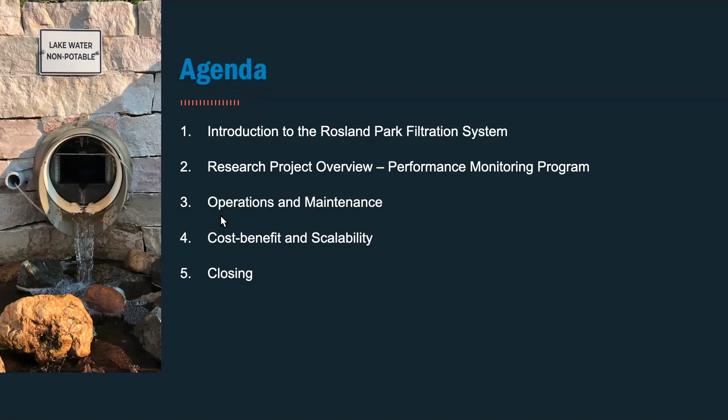Okay, so where are we going? The first few slides, Erica will run through the background and the higher level picture of how we got to the point of putting in the stormwater filter. I'll go over the results of our actual research program, the performance monitoring results. We'll look at the operations and maintenance we've had to do over the last 3 years. We'll look at the cost benefit, scalability, and then we'll have some closing remarks.

Thanks, Andy. So as Andy mentioned, I'm going to provide high-level context and background of our decision to install the high-volume stormwater filter in partnership with the city of Edina.

So for those of you familiar with the Twin Cities metro area, the project location is just off the southeast corner of Highway 100 and 62. And I know we have some folks joining from outside of Minnesota, so this project location is in the city of Edina, a southwestern suburb in the Twin Cities metro area of Minnesota.

This filter is located in Rosland Park, which the city of Edina owns and operates. The filter is located between Swimming Pool Pond and the north basin of Lake Cornelia. It's in a fairly heavily used park with amenities like disc golf, a playground right there, and it's also right near the Edina Aquatic Center.

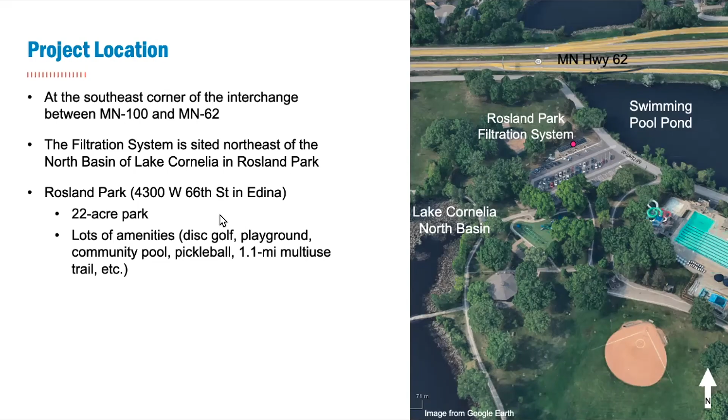So why did we need to think about installing a filter in the first place? The big picture is Lake Cornelia is unhealthy. It is a shallow urban lake that receives a large volume of stormwater runoff.

If we look at the graph located here, what you see is summer average total phosphorus. The darker orange bars are for the north basin of Lake Cornelia, and the lighter orange bars are the south basin. There are 2 basins to Lake Cornelia connected via a pipe. What you can see from this graph is, since monitoring data displayed from 2003, we are above the state standard for total phosphorus in a shallow lake. So we have an unhealthy lake with a lot of phosphorus fueling algae blooms, and we're seeing blue-green algae blooms in this lake quite frequently.

So poor water quality, highly impervious watershed with a lot of watershed stormwater runoff. And beyond that, there's also a 2018 total maximum daily load that identifies phosphorus and has a phosphorus reduction goal for North Cornelia. Beyond phosphorus, there are other water issues with this lake.

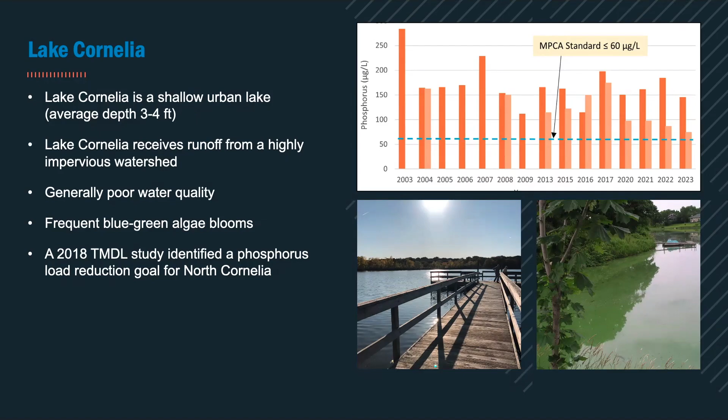Beyond the filtration vault we're going to talk about today, there were other management strategies that we looked at and addressed.

So again, the primary phosphorus sources to Lake Cornelia include watershed runoff, our external sources coming into the lake, but there are also in-lake sources. We have phosphorus loading from the sediments in the lake.

Since 2019, we've been working on some improvement strategies as the watershed district. We did an alum treatment in 2020 to minimize sediment phosphorus loading to the lake. The city of Edina had also been doing curly-leaf pondweed treatments, which the district took over in 2023.

And then we've also been doing goldfish management. I mentioned we have a lot of goldfish in the lake, and I was going to share the number we've taken out because it might astound some people. Between North and South Cornelia, between 2023 and 2024, we've removed 67,000 individual goldfish from these two lake basins, amounting to about 5,000 pounds of goldfish. Fortunately, we've seen some response in the native fish population — we're starting to see a better, healthier native fish population in the lake as a result.

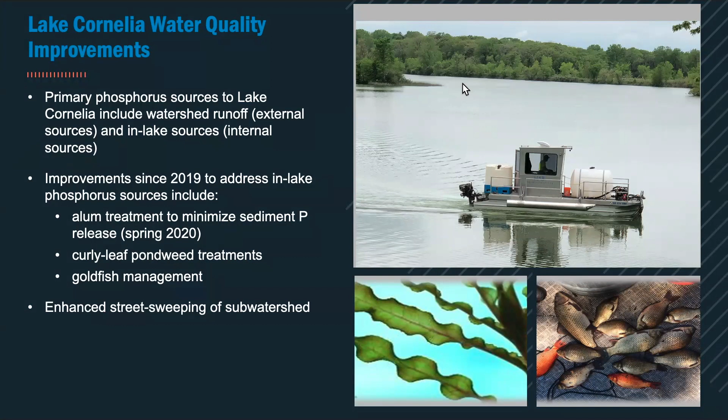So we're talking about BMPs in tight urban spaces. Just to give you some context to the sub-watershed draining to Lake Cornelia and Swimming Pool Pond, there's about 410 acres that drains to Swimming Pool Pond, highlighted in yellow. It's very densely urban — we have Southdale Mall, a medical complex, a lot of hard impervious surface, and part of Highway 62 that's draining to Swimming Pool Pond.

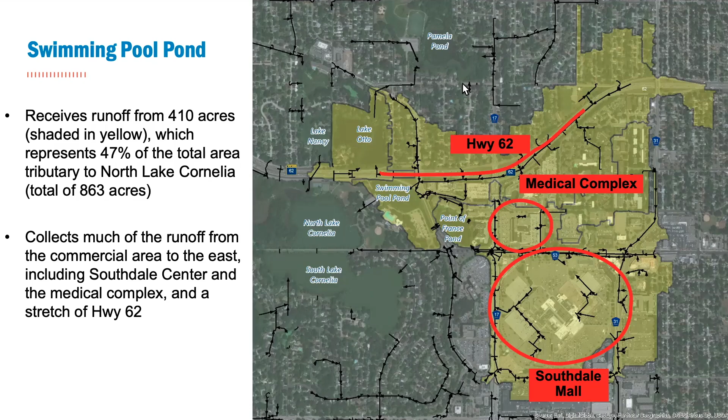That's about 47% of the tributary area to Lake Cornelia. So again, we're dealing with these highly urban spaces, and we have to figure out how we can manage the external load coming into these water bodies.

So what were the objectives for the watershed district in partnership with the city of Edina to install the Rosland filtration system? I think you've probably already realized we are really trying to address the external phosphorus loading to Lake Cornelia so we can have a healthier water body.

We're also trying to manage installing a best management practice in a small footprint. One of the desires from both the city of Edina and other stakeholders was to preserve green space in the park, so we really needed to minimize the footprint of the filter as we looked to design and install it.

And then finally, we are looking to utilize the existing storage capacity to provide a near continuous water source to run the filter. What I really mean by this is we are looking to not only run the filter when we have stormwater runoff or rain events, but we are looking to use a water body to be able to run it continuously.

So how the filter operates: under normal water levels, it pulls water from Swimming Pool Pond. And then when we have lower water levels, it's actually able to pull water from Lake Cornelia.

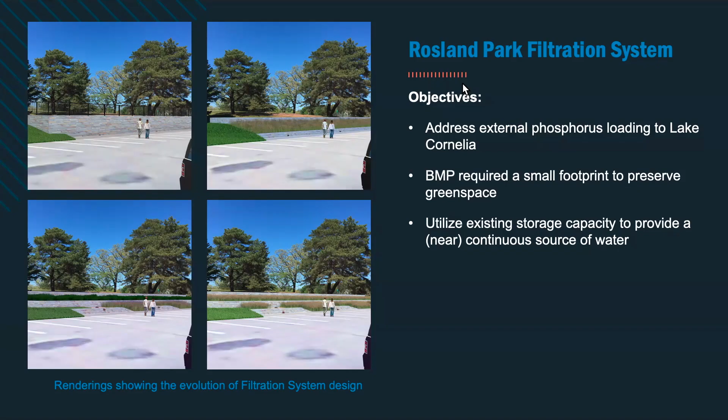The system was constructed in 2021 through early 2022, and we got it started up and running in the summer of 2022. Then in August is when we started the heavy-duty monitoring to really understand how the system is performing, what it's doing. Again, this work was supported by the Minnesota Stormwater Research Council and funding from the 9 Mile Creek Watershed District.

I definitely want to call out again that we had a grant from Hennepin County through their Opportunity Grant Program, and the Board of Water and Soil Resources through a Clean Water Fund grant, for the construction of the filtration vault. So we had about $850,000 in grant funding for the installation of this vault as well.

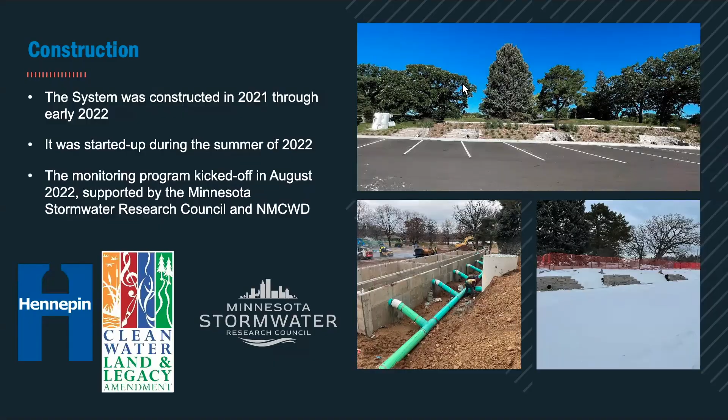And with that, I'm going to pass it back over to Andy so he can get into the details of the construction of the vault, how it works, and the monitoring, which I'm sure you're all excited to hear about.

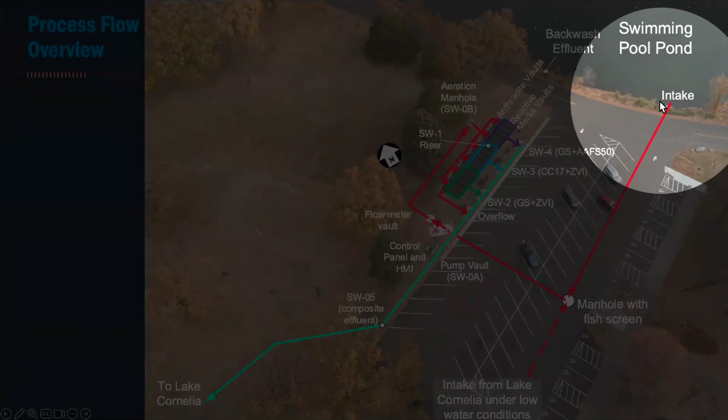So just to walk through where we are, starting up here, this is Swimming Pool Pond. The intake structure comes down to a manhole where we've installed a fish screen and a T that comes over to this little concrete pad where we have a pump vault. Inside is a submersible pump that's capable of pumping out about 400 gallons per minute.

It then flows via pipe through another vault that has a magnetic flow meter so we can monitor the inflow and flow. Still underground in a pipe, coming over to a vertical standpipe that we've called an aeration manhole. What this is, is a vertical pipe where the water is allowed to cascade 3 feet down or so just to aerate it.

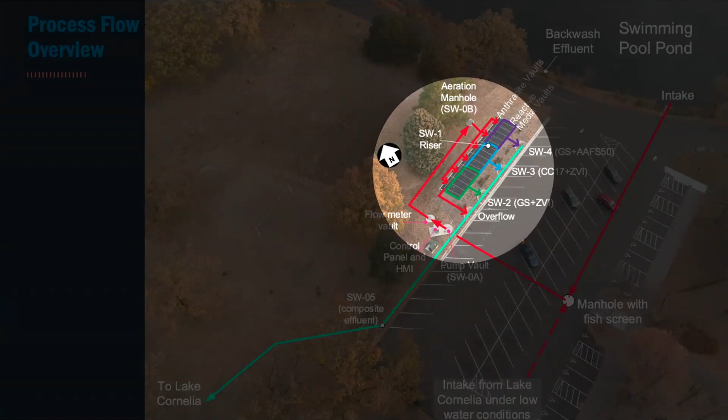And then from there, now we're flowing again through a pipe, following the red lines. Then we go through a manifold through 6 anthracite pre-filtration cells. And then the green, blue, and purple are our reactive media cells, that's what's actually doing the phosphorus absorption. Everything from there is gravity, so we go from the green, blue, purple cells down through this teal pipe to Lake Cornelia.

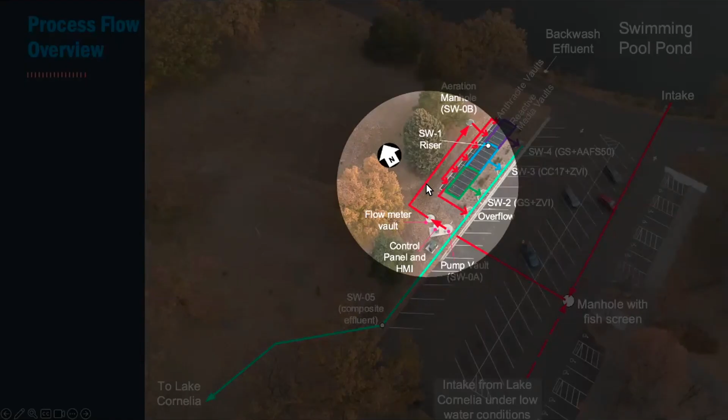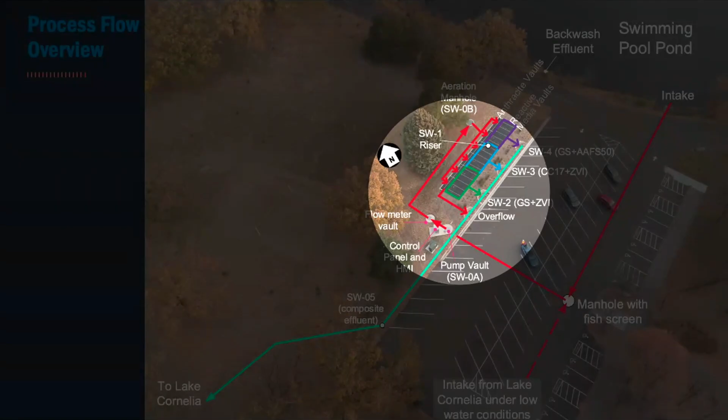The last thing I want to point out on the process flow is right about here, you'll notice this other red line. In the anthracite, its main purpose is to remove suspended material before we get to the reactive phosphorus absorption media. When that anthracite basically gets full of all the TSS and other debris we're removing, that water overflows. The intent is that an operator can easily drive by the system and say, oh, I see lots of flow coming in the overflow, time to do a backwash.

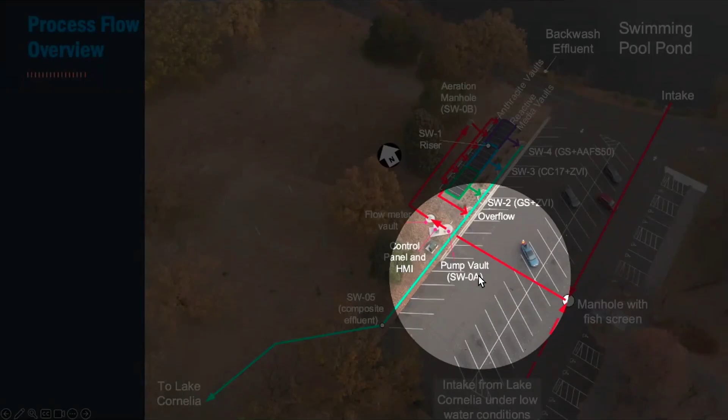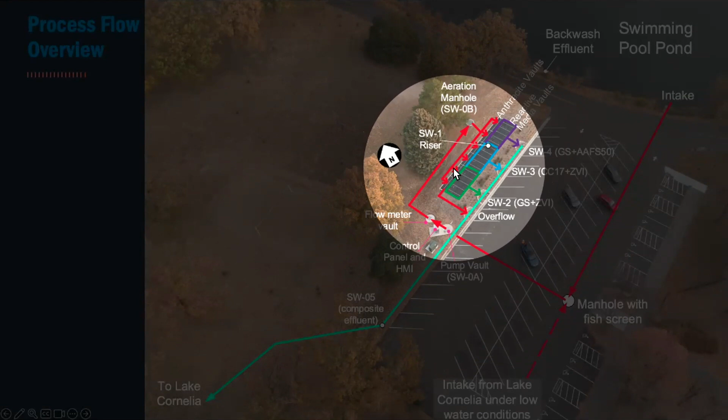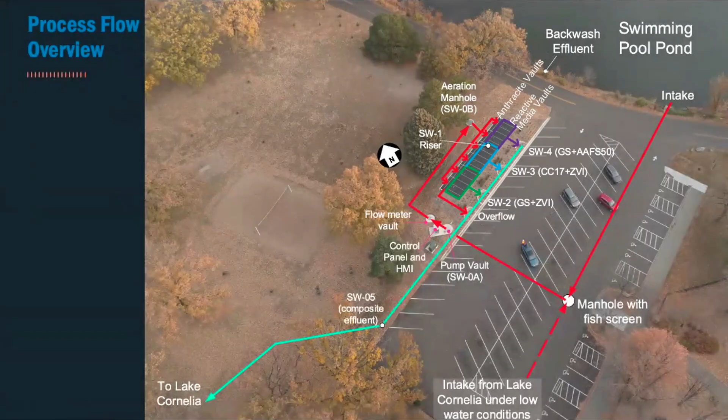Okay, so we just did this walkthrough, but just to give a little bit more granular context. Anthracite again, we have it split into 6 different cells, and the reason is so that we can perform a backwash using the forward flow pump. When we're doing a backwash, what we're really trying to do is fluidize that bed, and typically you need a higher flow rate than your forward flow rate to do that. So if we're going 400 GPM forward, to do a backwash we need to split it, and just by the math, how the calculation works out, we figured we needed to split that cell into 6 different cells so we can do a good job backwashing the media with a forward flow pump.

Backwash in this case is a pretty manual operation, so we have to physically go out, turn off the forward flow valves, and then manually turn on the pump for each cell, and do that for anywhere from 15 to 30 minutes or so per cell.

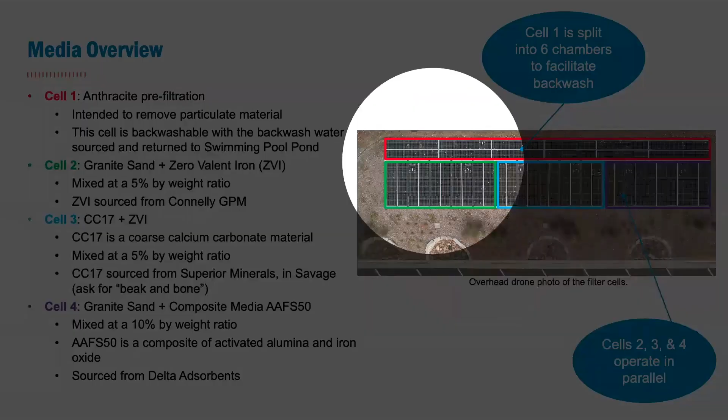So the media, I think I mentioned already, is anthracite. Anthracite is a hard coal-based material. We use it a lot in the drinking water treatment area, it's in lots of mixed media filter cells. If you see a mixed media filter cell, typically there's 3 layers: sand, garnet, and anthracite. Anthracite sits on top because it's less dense, and it's a little bit coarser, so you don't plug it up before it goes through the finer material. In this case, we're just using anthracite, so we don't have a mixed media filter cell, it's just anthracite.

Then we go into our color coordinated cells, so just going through the list. Our first cell has granite sand with zero valent iron. Zero valent iron is just the iron in iron enhanced sand filters, it's just shards of iron. Granite sand is just a little bit coarser sand than typical C33 sand that you might see in an iron enhanced sand filter, but we're trying to do basically the same thing, mixing iron with an inert carrier media that holds the iron in place.

The next cell, the blue one, is CC17 mixed with ZVI, zero valent iron again. CC17 is calcium carbonate, it's a pretty coarse aggregate material. We sourced it from Superior Minerals in Savage, and I love this, the media is actually called beak and bone. So if you're looking for it, I asked the guys, I was like, what is this, crushed up beaks and bones? No, it's a feed supplement, and maybe y'all knew that, but I was pretty astounded.

So it's a pretty cool media. The last one, the purple granite sand, is the same inert media as the first green one. It's a composite media we sourced from Delta Adsorbents, AAFS50. AA is activated alumina, and FS is ferric sorbent, so it basically has activated alumina, which is aluminum oxide Al2O3, as the support, with a coating of iron oxide on the outside.

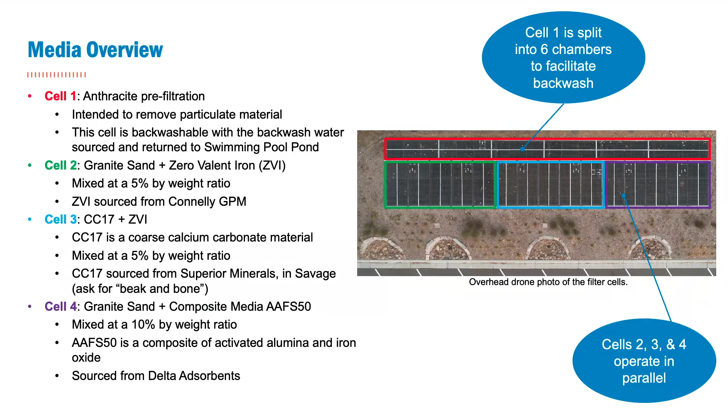So all three of these cells, the green, blue, and purple, run in parallel. It goes down through the anthracite, and then we come out through each of these media cells.

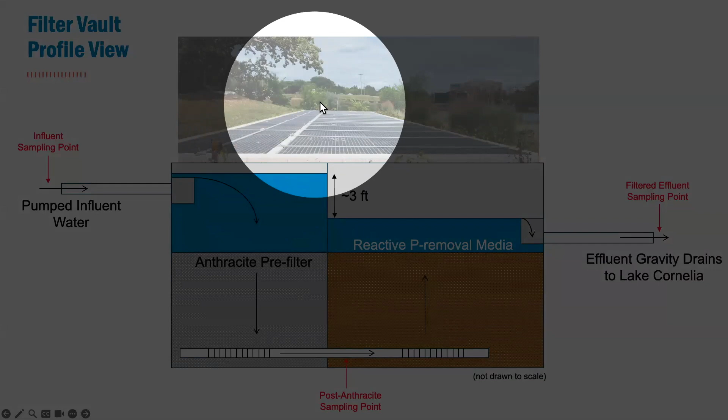This gives you a profile view of the filtration system. This is not an actual picture, as if we're looking sideways at it and slicing away the ground. We have our influent water coming in on the left-hand side. That flows over a weir structure down through the anthracite, through an underdrain system with perforations, then flows over and up through the reactive media, then out, and gravity drains to Lake Cornelia.

We're collecting samples through this monitoring program at the influent, and before and after anthracite. To collect this sample, we have a standpipe in one of the media cells that runs all the way up. So we're collecting water before it's going through the reactive media, and then to get the last bit, we just collect a water sample as it's overflowing out the effluent.

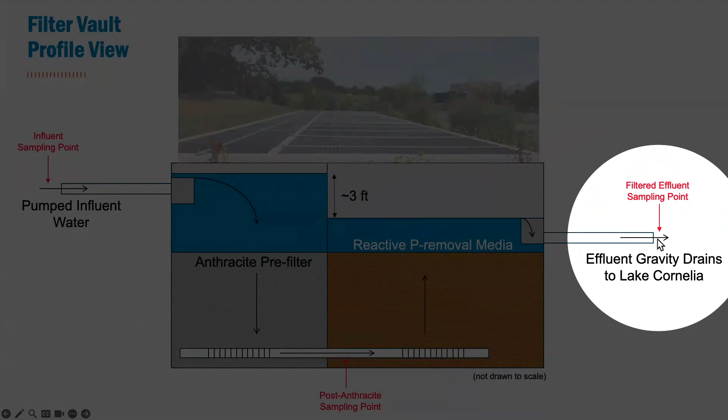The media depths here are about 2 feet of media, but it's not drawn to scale because we have about 3 feet of head between these two cells. The purpose of the downflow-upflow configuration is to take advantage of the small amount of head we have to push the water all the way through the media.

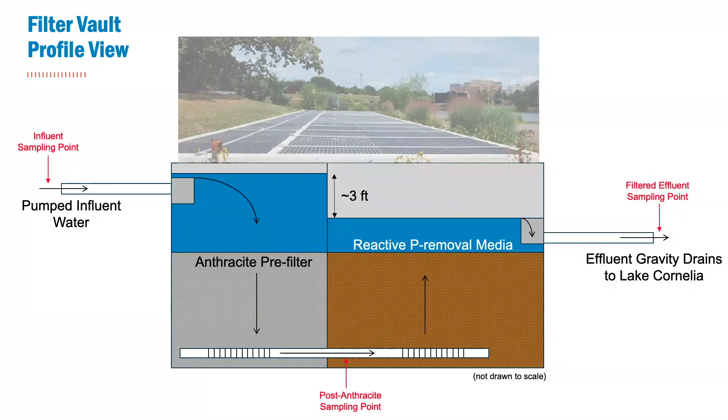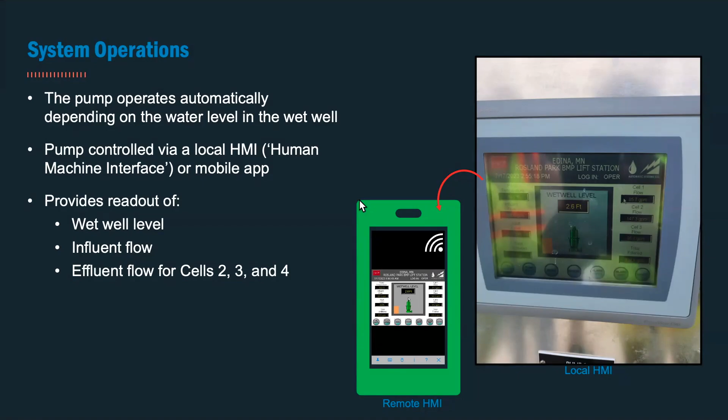The other cool thing is we have a remote HMI, hooked up to a cellular service, so we can access it on the phone and turn on and off the pump as needed, and see if it's operating, which is really helpful since monitoring the cell is our main purpose here. We check: is it operating? Does it look like good conditions? Let's go collect a sample.

It's a removable sheet of expanded steel - you pull it out and clean it off. The two main routine maintenance operations are backwashing the filtration cells, mostly done by the City of Edina. Backwashing is a manual operation that takes about 2 hours per backwash, and there are 6 cells, each backwashed individually.

The frequency of backwash depends on the season. In the shoulder seasons, spring and fall, we can get longer run times, maybe about once per week. But in summer when we have algae cooking, twice a week is good, sometimes more. The fish screen itself also needs cleaning, because we get algae, filamentous algae and debris building up on it that acts as a dam on the pump, so we have to go out and scrape it, sometimes more frequently than a backwash.

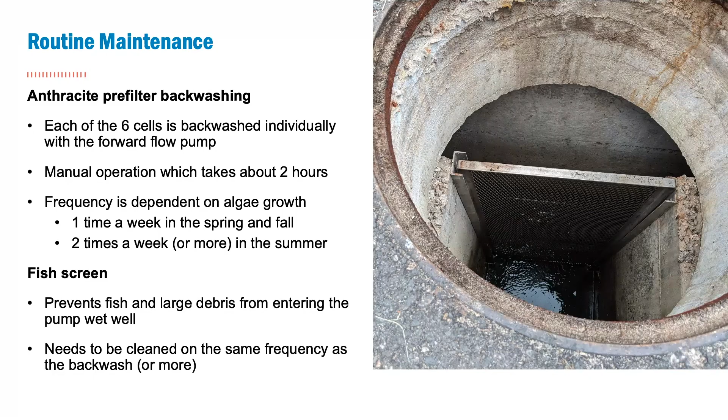Between August of '22 through the end of last season, which was around August or September, we collected 24 sample sets. And these are the parameters we looked for.

And then we did some reduced frequency sampling for total alkalinity and some metals. The primary purpose of these metals - we have calcium, magnesium, those are our hardness parameters, and then we have iron and aluminum. We're looking at media integrity.

Just to orient you - I think we've already seen some of these pictures, but this is the effluent from the filtration system going up into Lake Cornelia here. That's a YSI in a jar. Here we're looking at our last sampling point, a small hatch that goes to the effluent. It's a combined effluent sample that gets both the filtered effluent plus any of the overflow.

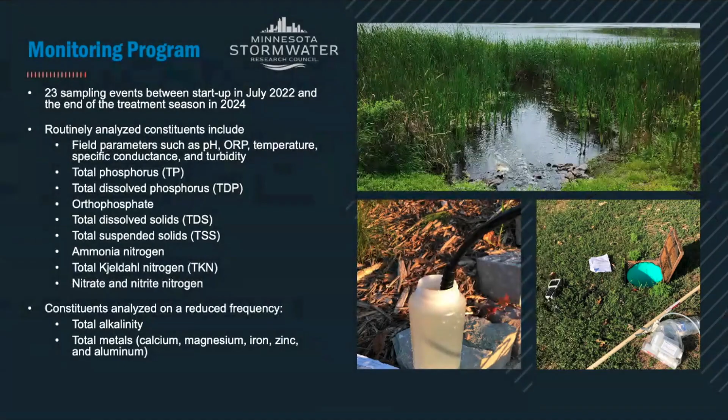The average flow range for the pump is somewhere around 400 GPM, and again, only about half of the flow is going through.

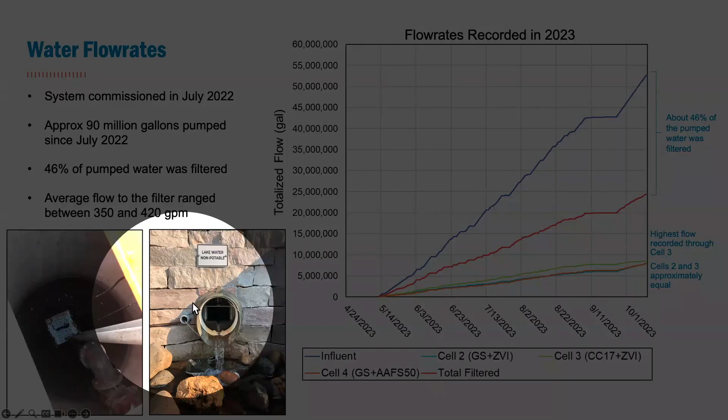I wanted to point out, because the flow meters are kind of interesting - there's a little plastic weir structure here. The weir is just calibrated elevation to flow. And on the left-hand side, you can see a little PVC pipe sticking out next to where the water is coming out. That actually has some bubble tubing coming out that goes behind the weir, at the bottom of the pipe.

It just sends out a little bubble once a second or so, measuring pressure - the elevation of that water in the pipe. And we've calibrated it to flow. So that's how we measure effluent flow.

So 2023 is what we're looking at for flow rates on the graph. In 2022 we weren't yet recording real-time flow data. And in 2024, unfortunately, we still have the influent flow, but the bubblers did not hold calibration - we would get good data for a few days and then they would be all wonky, so we'd be seeing flows that looked bigger than our influent, which didn't make sense. So what we're looking at here is really the influent flow in blue from 2023.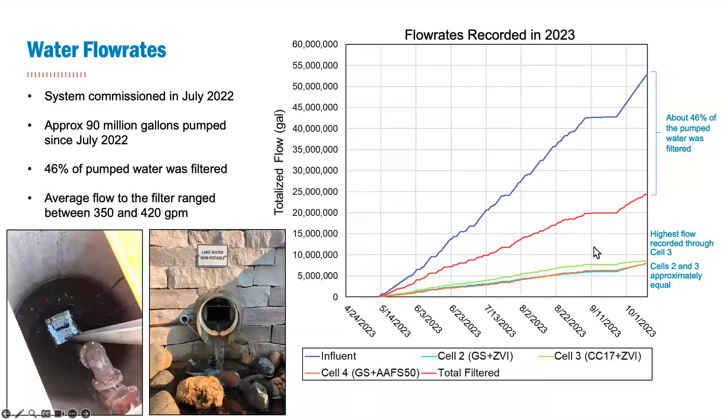Okay, that's flow. Now looking at some field parameters. So just to walk through, the x-axis is the same in both, it's month and year down here. And we're looking at pH and dissolved oxygen.

We have 2022 separated by winter, 2023 separated by winter, and then 2024. The colors are a purpley dark blue, green, teal, and orange. We're looking at pH through the filtration cell, and dissolved oxygen through the filtration cell.

A few key things I want to point out. For pH, you'll notice 2023 again has our best record. We see this quite high increase spike that's probably the algae working, sucking all the CO2 out of our water. Because we know how alkalinity, CO2 and pH work, pH goes up. So we get this temporary hump when the algae are really working.

We see it again in 2024, although it was a little bit delayed. And in 2022, because we only got 3 good data points, you can see the pH is still relatively high relative to where it is coming out of the filter.

I think there's a couple of explanations as to why the pH comes in so high and why it's moderated as it's coming out. Because it's CO2 driven, my guess is that we're pumping and moving the water around and it's coming back into equilibrium with CO2 in the atmosphere.

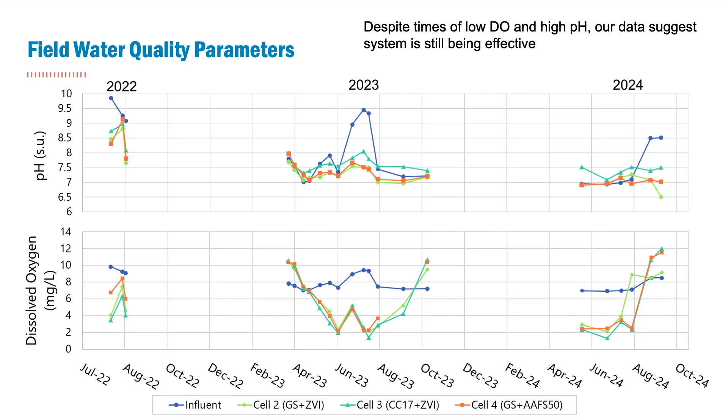And even though we see these wild swings, where we see high pH, and we might think that's really bad for phosphorus adsorption to iron, and we see low DO, again, because we could get reducing conditions for iron and then release the phosphorus it's adsorbed - even though we've seen these things happen, we haven't seen a result in release of phosphorus from the filter. But I think monitoring these field parameters is still really important for the system.

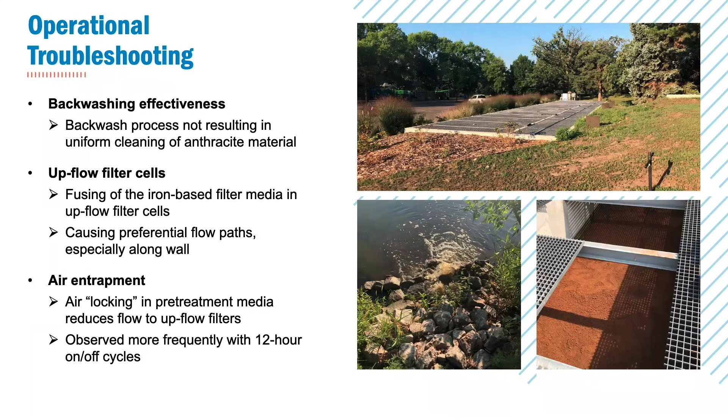Okay, so we talked about the media fusing and the backwashing. For backwashing, the plan here is to get a higher capacity pump, something that will give us more oomph when we're doing a backwash cycle.

I think we need something on the order of 700 GPM. So the engineering challenge right now is really to figure out where we can get that flow to make that happen.

Key design parameter here, pertinent if we're thinking about TSS or particulate phosphorus removal in a filtration system like this: we can't make assumptions in terms of summertime high temperatures to get the same backwashing fluidity. The temperature of the water matters because the viscosity changes with temperature. The colder it is, the more gel-like it is, and the less ability it has to raise and fluidize the bed. So if you assume your temperature is warmer than it actually is, you're not going to get the same oomph. We assumed warmer water temperature than we actually had.

Media fusing. I've got a couple of pictures showing our attempts to do this activity by hand. This is a 2-foot media depth, looking at cell 2, the granite sand with ZVI mixed with it. It was fused the whole way through — the top wasn't just loose and the bottom fused, the whole thing was fused.

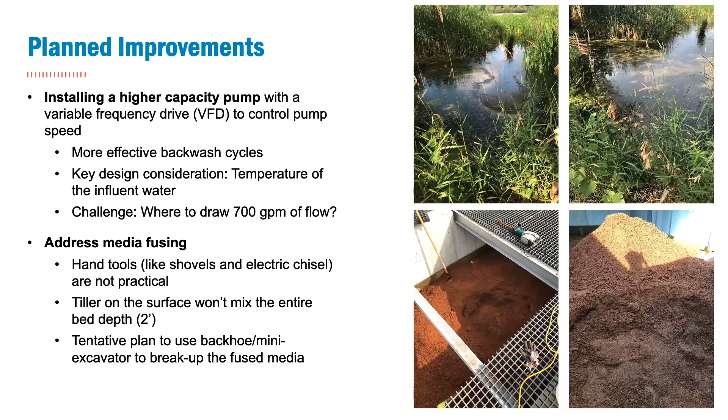We were using this electric hand chisel, basically a mini jackhammer, oscillating back and forth to try to break this stuff up, because using a shovel or hand pick was a lot of effort. We did as much as we could by hand as a research team, but our challenge was we had nowhere to put the media because we've got vertical walls all around us. So the plan is we've got to bring in heavier equipment, scoop out some of the media, break the rest up by hand, maybe use a vactor truck. That hasn't been decided either.

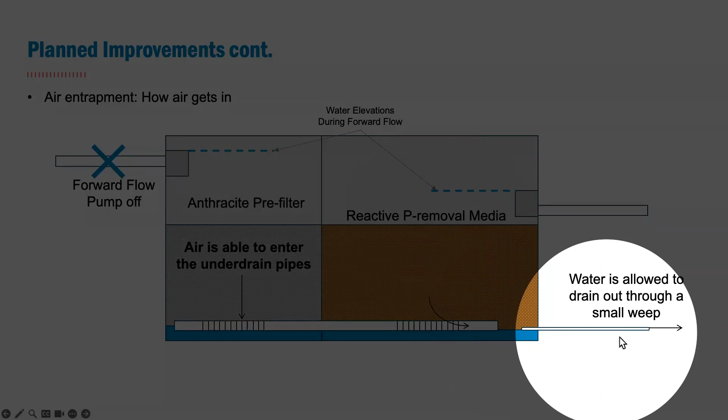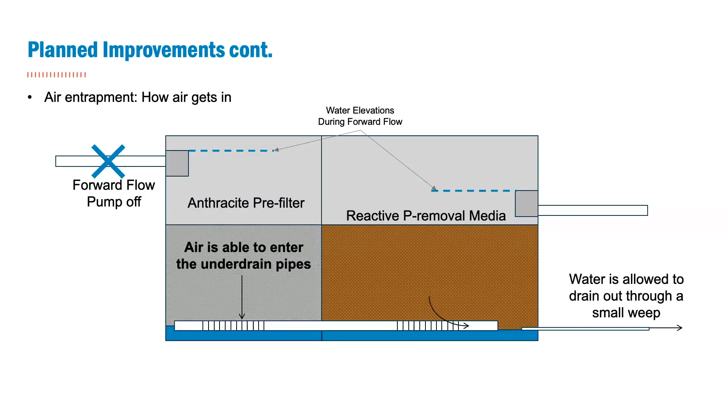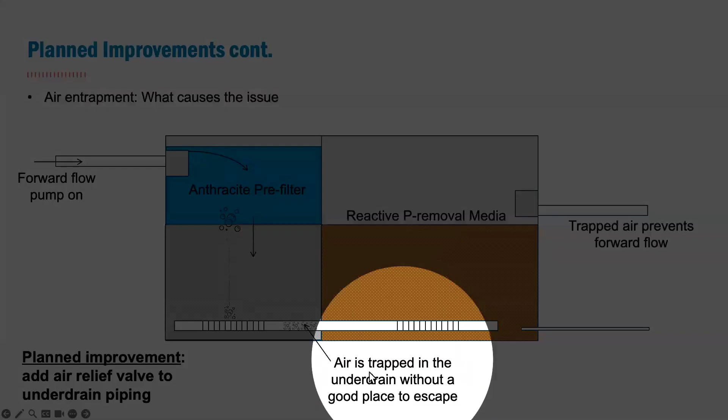That allows the media to dry out over time. Over those 12 hours, you'd get media that is dry, except perhaps below the weep drain's invert elevation. This is when air can get into the under drain system — we've dried it all out, it's drained. Then we go to forward flow, 12 hours have passed, it's morning again, we're pulling water. What we see is basically a column of water that just wants to sit on top of the anthracite. My feeble attempts at illustrating this — we've got air stuck in that pipe with nowhere to go.

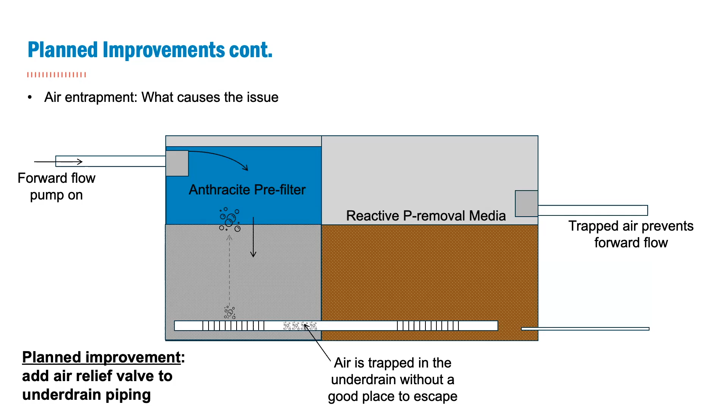So the fix for something like this: in water treatment and pipes, you put air release valves all over the place. Anywhere you've got a low point, you want an air release valve so you don't get air stuck in your pipe. That's the fix, though it's not quite as simple as this — I couldn't figure out a great way to show it on the diagram, but the goal is to put an air release valve on this thing, so the air has somewhere to go other than back up through the media. Our solution for now has just been to try to run this thing as frequently as we can, rather than give it 12 hours to drain and dry out.

Okay, cost estimates. I'll go through this so we have a little time for questions. Basically what we're trying to show here is construction, annual maintenance, and annual operating costs, put together over a 30-year period with a 3% interest rate, comes to about $107,000 per year. On a flow basis, that's about $4.50 per 1,000 gallons treated.

This gives you a sense of what we're including. Construction of the system is about $1.5 million. Annual maintenance accounts for things like pump maintenance and attrition — replacement of media due to attrition, since backwashing loses a little bit of anthracite every time. Annual operating is really an operator going out there doing backwashes and cleaning the fish screens.

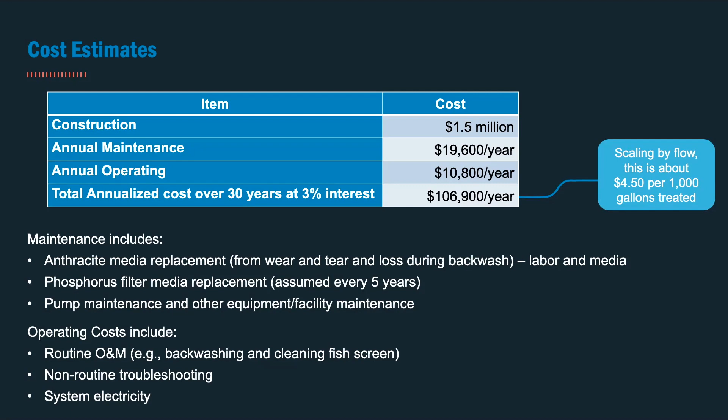So then the cost benefit. I think I was here a little less than a year ago for the annual meeting, and these are similar numbers to what I presented then. We're looking at somewhere around $9,500 per pound over that 30-year period, just dividing our annualized cost by our annual removal. We have 2023 as our best records, and we removed a little over 11 pounds of phosphorus. So it's just a simple division.

We talked about a couple of improvements already - the bigger pump to do a more effective backwash and breaking up the fused media. With those two improvements, we're hoping we can get 70% more water through, equating to, instead of 11 pounds per year, more like 19 pounds per year. So we hope to bring our future cost benefit down to somewhere between $5,000 and $6,000 per pound.

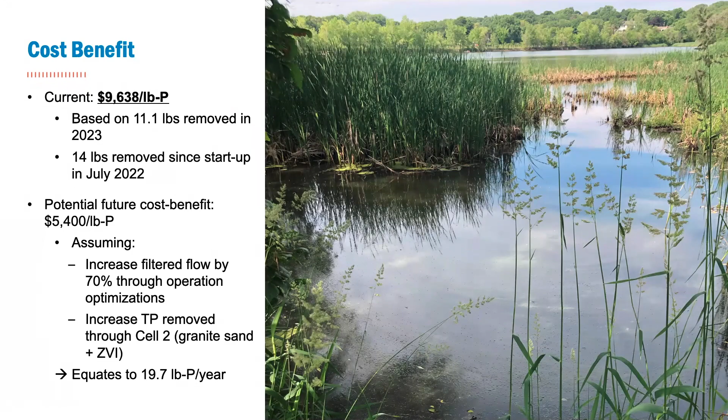Thanks, Andy. Beyond the research value of this filtration vault, which is also designed so we can swap out media and try other media types optimized for phosphorus removal, this is also a great demonstration site.

The filtration vault is in a heavily used park, and we've done multiple tours to show the vault and explain how it's used. We also have an interpretive sign out there so park visitors can understand what they're seeing, learn more about water quality and the type of projects we do to improve water quality. One fun thing we did with the sign is

it actually has a touch and feel component, which you can't see in this graphic - we took a little bit of each type of filter media and glued it onto the sign. So you can actually see what each filter media looks like and touch it as well. I think that's a neat component of this educational sign.

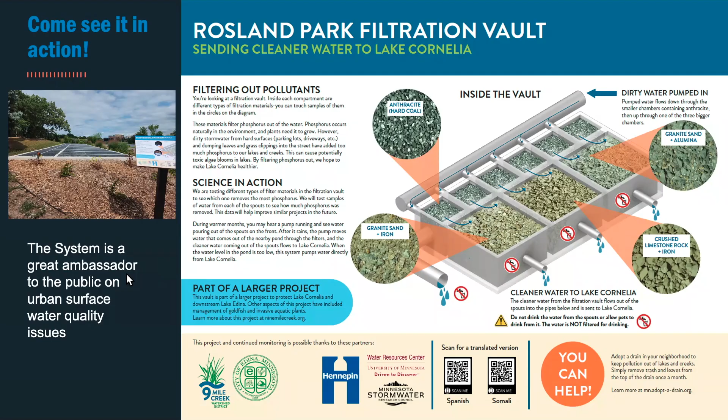And with that, I just want to say thank you, and especially give a shout out to the city of Edina. They are the folks operating this system for the Watershed District, and of course this project went in partnership with them. They've been critical in the operations and troubleshooting of some of the things we need to improve and move forward with.

All right, round of applause for Erica and Andy.

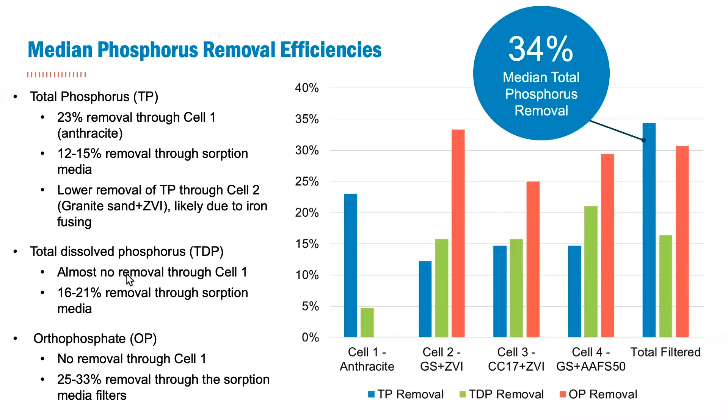To frame that up for people, when you're at the end of the pipe and you're talking about stormwater, that's right after a storm. But when it hangs out in a pond or lake for more than a day and gets any sunlight on it, that dissolved phosphorus is immediately utilized - it's sucked up.

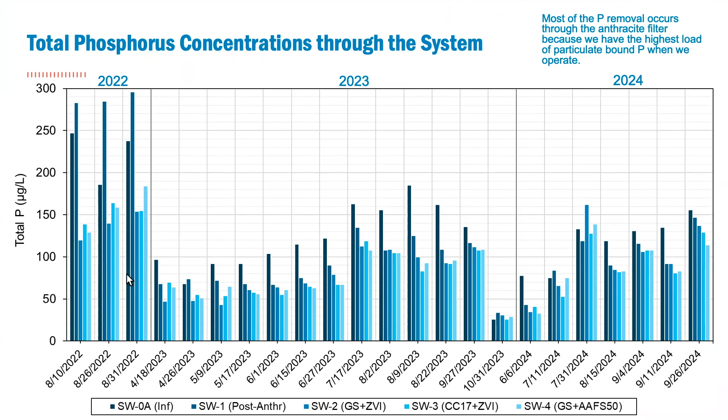One more point back on this graph I'm talking about - the blue bar, that's all algae. So when you start to think about not storm-by-storm but continual treatment, and if you're getting in any surface water of any appreciable size, starting to think about much more particulate design is the key.

If we were to know what we know now and roll again into that design process, that anthracite filter would be the majority of the space. That's right, and we mentioned it when we started - sited it here because the swimming pool pond is right there. So you have a water source, but exactly what you just said, it's no longer fresh stormwater coming in, it's sat there for some residence time, and the algae take it up so quickly.